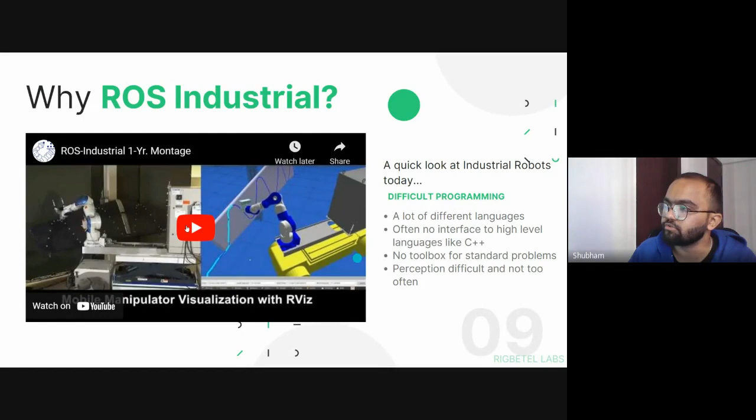So I again have a small video on the progress of ROS Industrial, what all things are done. Let's have a look at that.

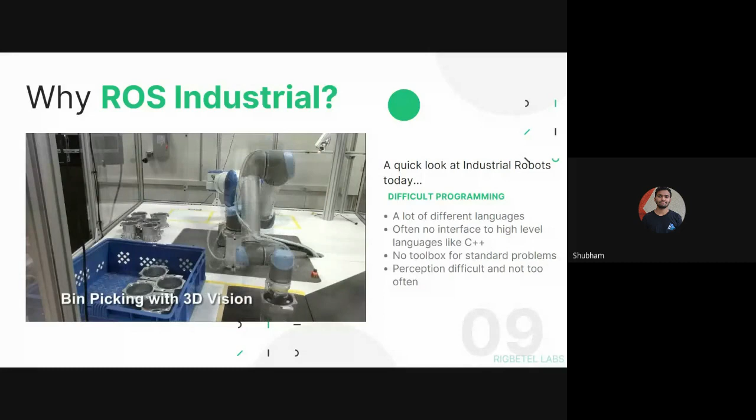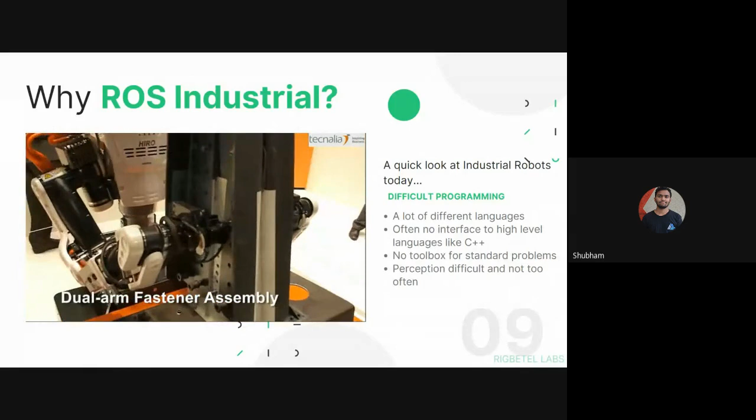So that was about ROS Industrial. You can see from the videos that people have achieved things like robotic arm pick and place, welding, and a bunch of other things that go from fabrication to manufacturing and a lot more.

Now the other advantage of ROS Industrial is, let's say a candidate is working at a company called ABB Robotics, and tomorrow that candidate has to shift to, say, KUKA. Since the company uses ROS to an extent, there wouldn't be a lot of groundwork to be done when you shift to a new company, since the development platform remains the same. This is a major advantage, because prior to this, every company had its own standards, programming languages, or interfaces used to develop these robots, so there was a lot of friction when someone transferred from one place to another.